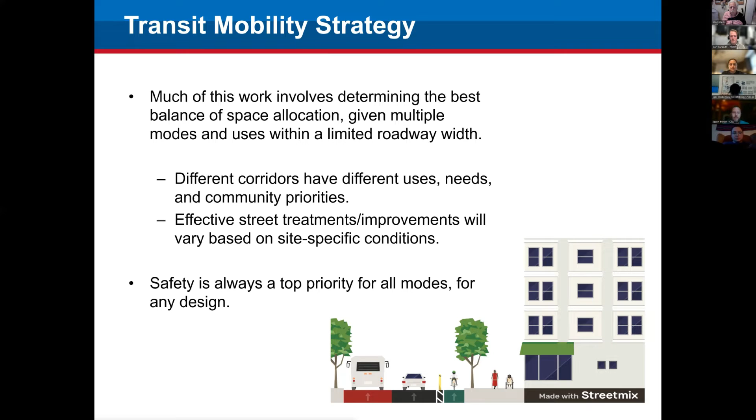So just a quick overview: we'll show some examples of bus priority projects that have already been built, most of them in the past few years, then some that are on the near horizon, and then longer term projects, before we open it up to the floor for discussion.

A few existing examples you may or may not be familiar with. Jeffery Jump was built in 2013, and it runs through the south side and then is an express bus on South Lakeshore before going downtown and utilizing Loop Link. Good segue to Loop Link, which is probably the one most people are familiar with and is the most prominent, going through the loop. We have stations with more amenities than usual, bus lanes, some queue jump signals. They function as bus boarding islands with separated bike lanes. We'll talk a little bit more about those different things as we move on, but it's kind of an example of a lot of what's going on.

And then there's TSP, which stands for Transit Signal Priority. That's when buses automatically talk to traffic signals and can turn the light green, or shorten or extend the green light if they show up on one, so the bus gets through as it's approaching the intersection, increasing speed and reliability. This has been installed on Ashland between Cermak and 95th, on Western from 79th to Howard, as well as some intersections on the Jeffery Jump.

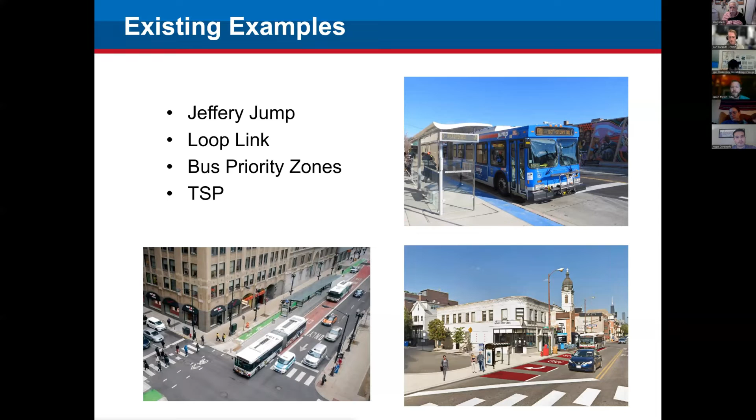So it's not something that you'll see or that's obvious, but it's happening and it's out there.

Now, bus priority zones. This is where we look at very high ridership corridors that have specific pinch points where our data shows consistently low speeds, bad reliability, or other problems which we think could be addressed by short segments of roadway treatments. You'll hear me touch on BPZs throughout this because it falls into both the already-built and short and longer-term categories, so we'll circle back to that.

The example you see here is on 79th Street over the Dan Ryan, near the Red Line station, where we have some bus lanes and shared bus right-turn lanes. Those were installed in 2019 in this particular case.

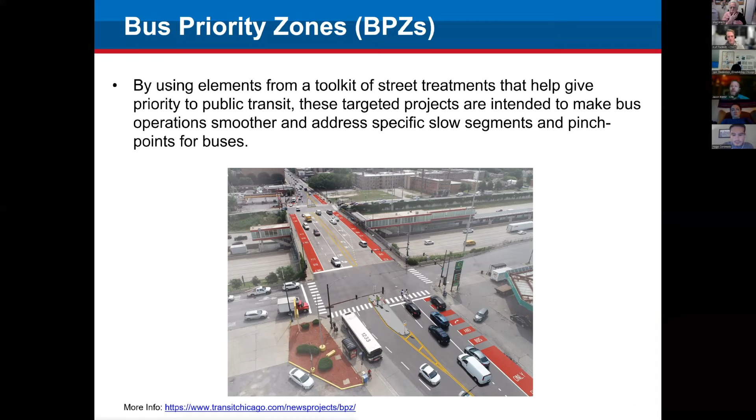When we think about bus priority street treatments, we call it a toolbox of treatments. It's kind of a list of items, not meant to be limiting, but just a resource for when we look at the specific context and issues going on with the opportunity to do a project. They fall into three main categories: bus stop treatments, bus-friendly streets, and bus-friendly intersections.

A couple of examples of stop treatments would be level or near-level boarding. An example of that is at Loop Link. I believe the platforms are 10 or 11 inches high, which is higher than a standard 6-inch curb, so it makes it easier and faster for customers to get on the bus, especially those with limited mobility.

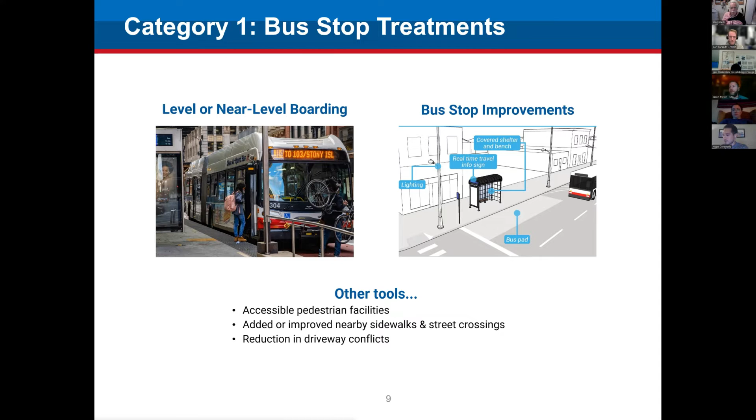Other bus stop treatments could be a bus shelter for the elements, lighting, and accessibility, as far as having clear sidewalk space to deploy a wheelchair ramp, or just for everybody to have a clear path to get on the bus. We look at driveway conflicts, if we can either relocate the bus stop or remove the driveway if it's abandoned. So there's a focus at the stops.

Then there's bus-friendly streets, which is probably what first comes to mind when you think about bus priority treatments on the road. A couple of examples here are curbside bus lanes, but the bus lane doesn't necessarily have to be on the curb. It could be parking on the curb and then what we call an offset bus lane. It could be center-running, which we don't have any of in Chicago, but that doesn't mean it is never an option.

And on the right, you can see an example of a bus boarding island, where there's space to do so. These are especially effective where there's bike lanes and bus service, because at the bus stop, it eliminates the conflict where the bus has to weave to the curb across a bike lane. This increases safety, and also has the benefit where a bus doesn't have to wait to merge back into traffic and wait for a gap. It's stopping in the flow of the lane where it can just continue forward, so increased safety for cyclists, buses, and improved bus operations.

So it's kind of a win for multiple modes there.

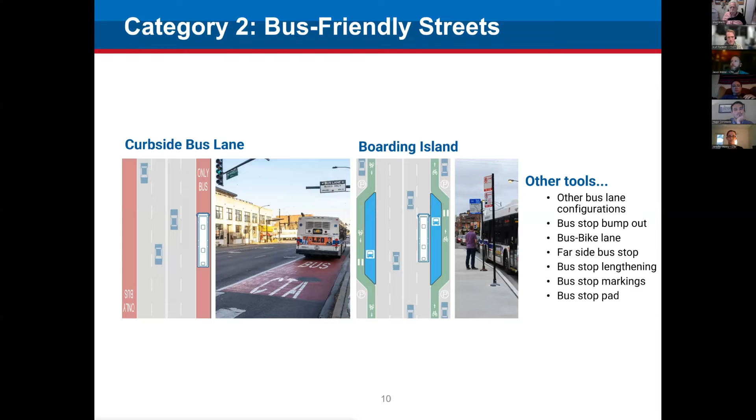Some other tools we have would be a bus stop bump-out, also referred to as bus bulbs. They function similarly to the boarding island, except it would be in the absence of a bike lane or where there's not enough room to have a separated bike lane and a bus bulb. The big benefit of that is at intersections, it's kind of like a pedestrian bump-out, if you will, that shortens the crossing distance, except it's just long enough that it covers the front and rear doors of the bus. So the bus can stop there and then just pull forward without the delay of having to wait to merge back into traffic. There are several other treatments we could do on the roadways, but in the interest of time, I'll keep moving on.

Then there's bus-friendly intersections. I had talked about transit signal priority earlier. Sometimes that's done, or most of the time in Chicago it's done just as a standalone treatment where general traffic will get the green light with the bus. In a few instances, the bus has its own space where transit signal priority actually activates a queue jump signal.

Which brings me to the queue jump, the other example shown here. If you picture it looking at the diagram, if a bus has its own lane and pulls up to an intersection on a red light, the queue jump signal—it's actually like a white vertical bar—means go to the bus.

It's not green just to avoid confusion with general traffic, but it allows the bus to get through the intersection before the rest of the cars waiting at the red light. So just like the name implies, it's jumping the queue of cars and therefore prioritizing the bus service.

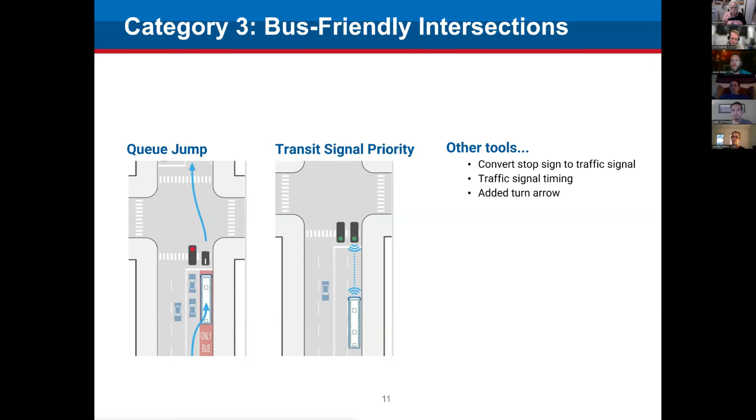Other tools at intersections that help traffic in general can be useful for buses as well, if it's a movement that they're making, just traffic signal coordination and optimized timing and adding a left turn signal, things like that. So we're always working to improve that on bus corridors. So that was just some examples of what we have been doing.

Right now on Route 20 Madison and 157, which I forgot the name of the route, it goes down Ogden and up into the Loop. Those two routes are complete, with rollout on 7 more routes anticipated by early 2023. At that point, if we get some feedback from the community and internally as well, and if it's positive, that could open the door for seeking additional grant funding or seeking next steps to continue to deploy the tactile signs.

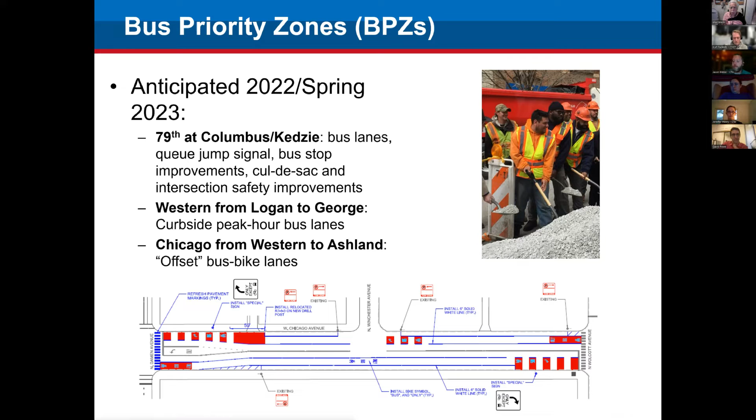They only have two lanes of traffic to cross now instead of four. And the bus can just pull forward after people get on and off, because it doesn't have to pull to the curb and wait to merge back over. So for pedestrians, cyclists, and buses alike, this was a win all around.

Also looking forward, either starting later this year or in the spring, on Laramie, we're getting creative with a hybrid bus bike lane. I've got to give CDOT some credit here for opening the door to this type of innovative treatment. In an ideal world, we'd have a separate lane for buses, for bikes, boarding islands, and everybody would have their own space.

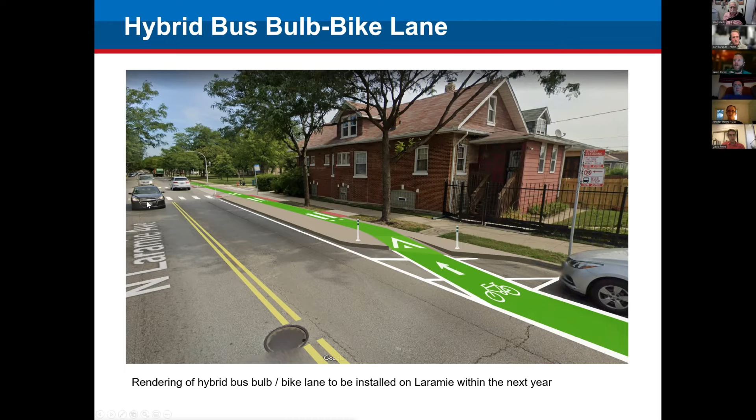And we're still maintaining the through sidewalk for pedestrians while giving bus riders a space to wait that's in addition to the sidewalk. So again, it's a plus for multiple roadway users. And you can see it shortens the crossing distance for pedestrians as well.

So getting into longer term projects, I'll start talking about bus priority zones again. This is the last bus priority zones slide, but we can get into it more later. We received some grant funding that will expand the bus priority zone initiative, and we're looking to reach additional corridors and neighborhoods. As I mentioned before, it's really looking at spot treatments and improvements to unsnarl the bus at pinch points where we have lots of frequency and lots of ridership.

Just like everything else, it's going to be a balance of the space being allocated to different roadway users, but we really think that there's a lot of places that have an opportunity for these targeted bus improvements that will really move things along. So we're also working with CDOT on this hand in hand, looking for opportunities for cost savings to really stretch the limited funding that we have, looking at overlapping projects so that when it comes to construction, we can make the best use of resources.

For example, if a road is going to be resurfaced anyway, that gives us a blank slate for the pavement marking that'll go down. Under the resurfacing program, which is federally funded, there's opportunity for minor curb changes, maybe a bump out or bus bulb, that kind of thing. So we're really looking to collaborate and make the most of our limited funding for that.

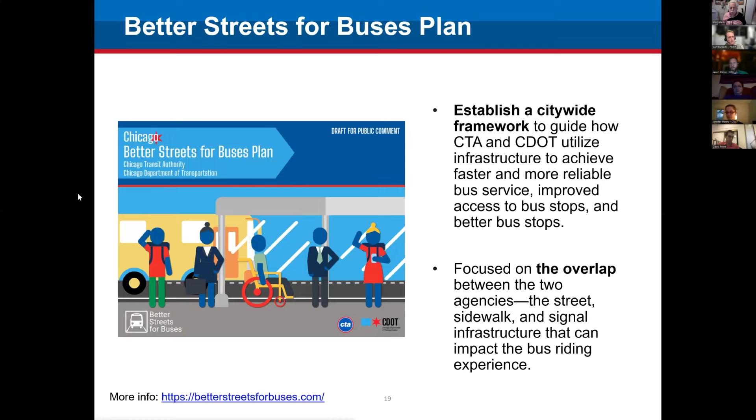And also improved access to bus stops and better bus stops. So there's a number of things that impact the bus experience that are sort of in CTA's control more or less, and don't have a lot to do with CDOT, like the frequency of scheduling. And there's a lot that CDOT does that doesn't necessarily impact the bus directly. So this plan is really focused on the overlap, the sidewalks, streets, and signal infrastructure that can impact the bus ridership experience. Next slide, Jason.

The plan is to have two main components. One is a street network that identifies where we would be prioritizing improvements. And then a toolbox of street treatments, which is sort of a menu of all of the different street treatments you can do that Jason actually summarized earlier in the presentation.

So in April, we began our public outreach process. We had a couple of virtual public meetings in May, and ended the public comment period in June. We had a number of activities to try to get the word out. It was a challenging time because we had to do most of the planning during the pandemic. So we did lean heavily on virtual interaction, but we tried to supplement it with hard copy materials at libraries, through ward offices, et cetera. So we wrapped that up in June.

Over the summer, we've been compiling and reviewing and analyzing all of the feedback that we received. And we're just now moving into the stakeholder discussions again to try to decide how we use that feedback to form and revise a final plan. We'll be doing another round of follow-up public outreach, but we haven't figured out the dates or times or places yet. So I don't have any of those to announce. And then the goal would be to finalize the plan in very early 2023.

Next slide. And then I just really wanted to talk about electric buses too. It doesn't have as much relevance to the CDOT realm as some other things, but I know a lot of people are interested in it. So if you weren't aware, we did release a roadmap for electrification of the full fleet by 2040. Our fleet is around 1,800 buses, so it's no small undertaking. We put equity considerations at the forefront in terms of prioritizing which garages would go first, and that plan talks more in detail about that.

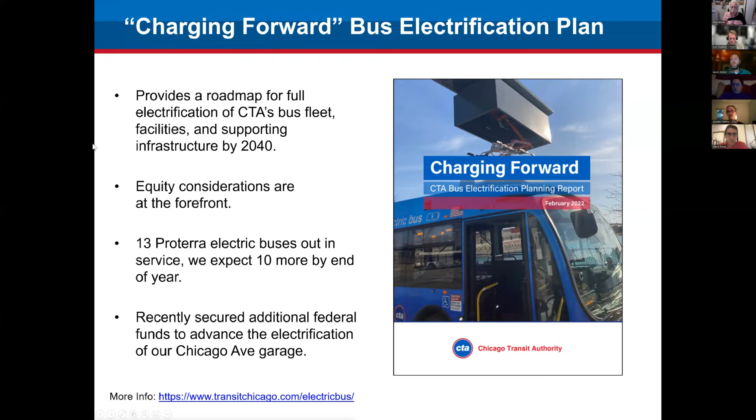Currently, we have 13 Proterra electric buses out in service on the 66 route. We expect 10 more to be deployed by the end of the year. And we recently secured an additional federal grant to advance the electrification of the Chicago Avenue garage. Next slide.

There are 3 on-route charging locations currently at Navy Pier, Chicago Austin bus turnaround, and at Midway. But the analysis that we did as part of Charging Forward to really see how we get to 100% concluded that the best approach to charging electric buses is to maximize charging at bus garages rather than having a lot of on-route locations. So we're anticipating a very limited number of additional on-route fast charge locations at certain key layover locations. So there won't be a lot of impact on the public right of way with respect to the electric buses.

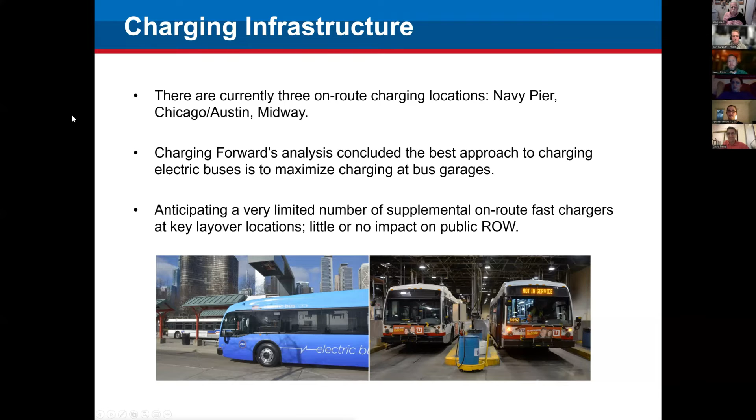The goal is to keep our service, not disrupt our service and not disrupt the public right of way with charging stations. But there's also just more practical considerations about centralizing the charging at the garages. It just makes it easier to manage. I think that might be it. Do I have any more slides? Nope, that's it. So I guess, Kurt, are you sort of facilitating from this point?

Yeah, absolutely. And I don't think I introduced myself in the beginning, but my name's Kurt Facknitz. I'm the design manager for the Complete Streets program at the City of Chicago. Wanted to table set a little bit on starting off the conversation at the end of this presentation here. We will get through some questions, so I will talk a little bit about those, but really want to make sure that this is more than a question and answer session, but a real collaborative discussion. And so as we're talking about some of these things that we'll work through, I can, again, facilitate that a little bit.

Definitely want this to be a conversation and not just Jason and Jen fielding these questions and giving answers, but really want a discussion about everyone in this group's thoughts, opinions, feelings about all these things that we're talking about, and the ways that we can sort of work together to get where we want to go in terms of improving safety, efficiency, comfort, availability of transit, and really making our streets work for all modes.

So to that end, to get started, and again, I'll work through a lot of these questions, but one thing that I think popped up that's really important and kind of bleeds into a lot of the things that Jason and Jen were talking about is, why, oh, sorry, I think my chat jumped.

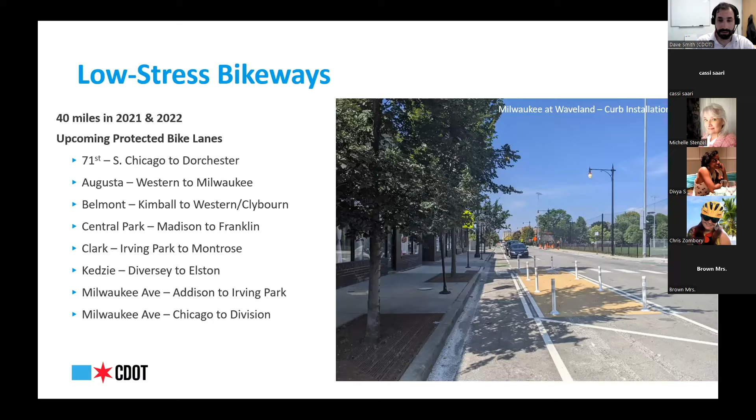And so the goal is to create a connected network of low stress options throughout the whole city. One of the things that we've heard quite a bit in our engagements, especially for people who are new to biking, is that providing a network that highlights local trips and local destinations is really important. And so we want to balance both of these scales, developing networks for neighborhoods, but also developing a comprehensive network across the entire city. And so the discussion here and this presentation is really about how do we prioritize where we go next? I've got a couple of slides here.

Chicago really is a city of neighborhoods. Different neighborhoods have different contexts, different perspectives, different needs when we're thinking about the citywide scale. And this graphic is trying to get at an acknowledgement of that, that it's not necessarily a one size fits all approach across the entire city. Network development is most successful when we partner with communities. And in the past, which I'll touch on in a minute, sometimes skipping through the process, especially in a community where biking isn't as visible, has been a challenge and has actually set us back. And so our goal is to speed up this progression, bring every neighborhood to the next stage of network development, and get as quickly as possible to a citywide network of protected bike lanes and neighborhood bike routes.

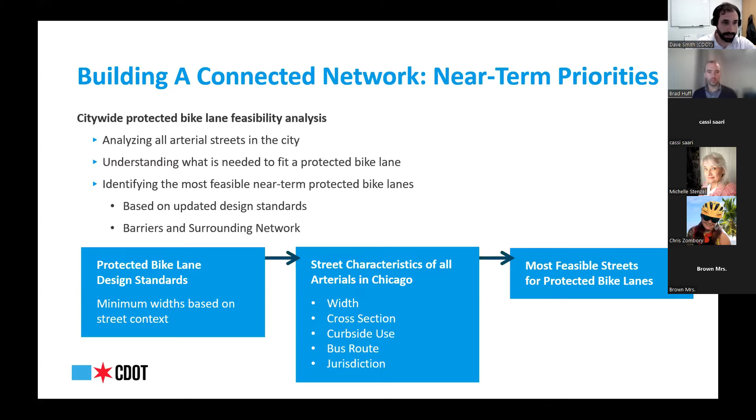I think this analysis can be really helpful in pointing us towards prioritizing streets and identifying where we need to push for top infrastructure, and to help make the case for trade-offs when it comes to creating space and allocating space on our roadways.

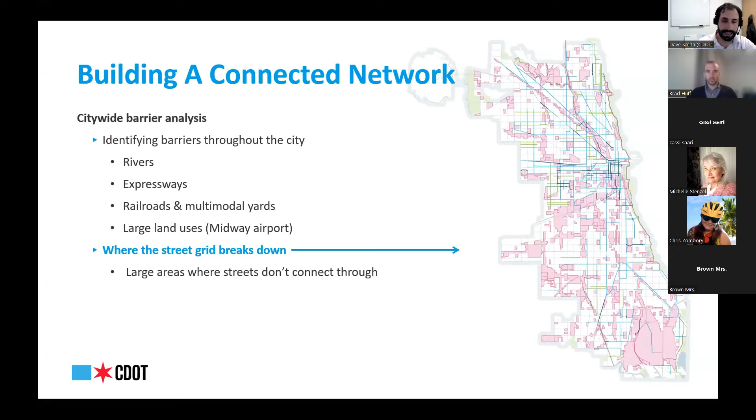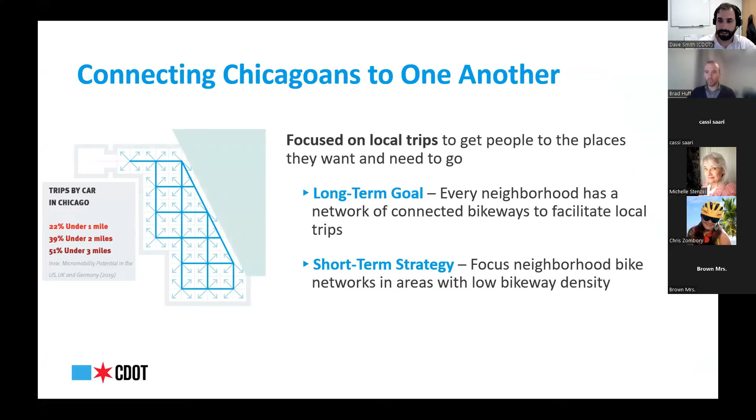I mentioned earlier that the neighborhood network effort has been focused in communities that have historically had very little. This year, we're partnering with the South Lawndale Little Village community, and we want to keep that momentum going to the larger Southwest side in the future.

The neighborhood network process we started last year, we worked in the North Lawndale community, and really started to build a relationship and regain trust within the community. We were able to come back last year and install protected bike lanes along Douglas and Independence Boulevard leading to Douglas Park.

We're continuing to partner with the Belmont Cragin community to keep the momentum going. But like I said, we really want to expand that to the southwest side where there's very little bicycle infrastructure. As I mentioned, balancing the neighborhood approach, the goal is also to create a citywide network of protected bike lanes, neighborhood greenways, and something we want to talk about in a couple minutes is how do we get there as fast as possible while still maintaining trust, maintaining relationships, and long-term success.

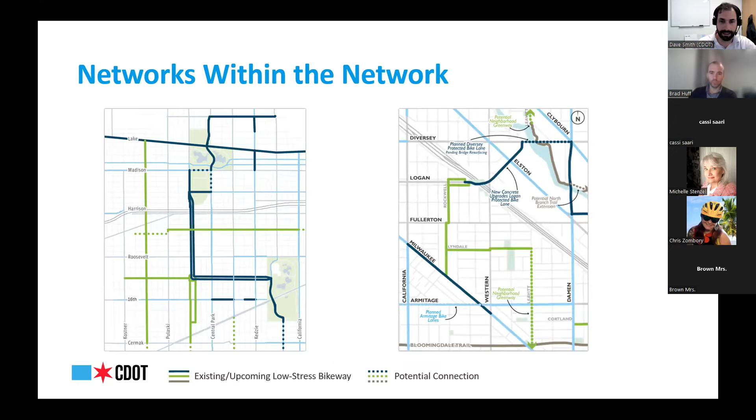One strategy is to think about developing networks within the network. So community networks, providing people with comfortable options to get to important neighborhood destinations like parks, schools, and commercial corridors. But again, thinking about that in the context of the entire city and balancing those two scales.

This is the second to last slide, and we'll get into the discussion, but wanted to show a map and a little bit of a preview of where our minds are at in terms of 2023 priorities. We want to get feedback from folks on what makes sense, what we're missing, and where we should be focused.

Secondly, we are partnering with IDOT on designs for protected bike lanes. As some of you know, the Clybourn protected bike lane, installed many years ago, was the first protected bike lane on an IDOT jurisdiction street. We've been cultivating and developing that relationship with them.

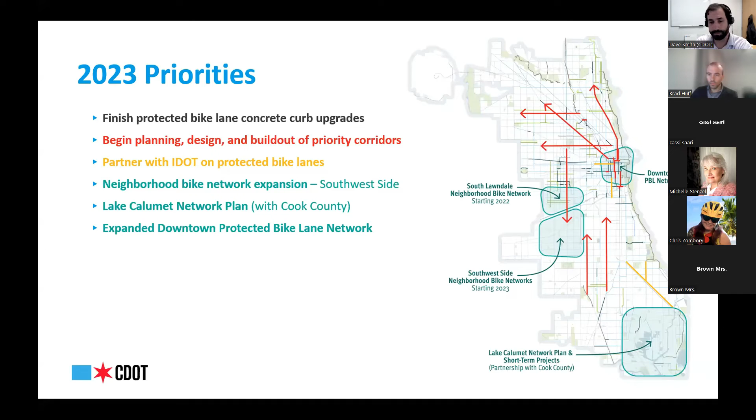I tried to get through that as quickly as possible. We want to move that into just an open discussion now, and I'll stop sharing my screen in a second so we can see each other a little bit better.

We put together these points just to help spark some conversation. First, there's a ton of work to do. We all agree on what we want to do, and we want to have a discussion of how we prioritize projects and neighborhoods. How do we engage with neighborhoods on the importance of a citywide connected network?

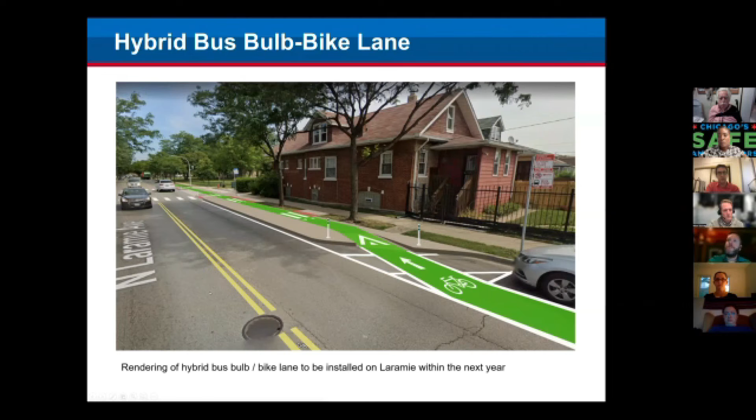On top of that, we also create digital content that goes on our social media, with the goal of having it shared to the ward office. We're still maintaining the through sidewalk for pedestrians while giving bus riders a space to wait that's in addition to the sidewalk — so it's a plus for multiple roadway users, and you can see it shortens the crossing distance for pedestrians as well.

So getting into longer term projects, I'll start talking about bus priority zones again. This is the last bus priority zones slide, but we can get into it more later. So we received some grant funding that will expand the bus priority zone initiative, and we're looking to reach additional corridors and neighborhoods. As I mentioned before, it's really looking at spot treatments and improvements to kind of unsnarl the bus at pinch points where we have lots of frequency and lots of ridership.

Every time a city street gets resurfaced under our arterial resurfacing project, that's an opportunity that CDOT actually has been using for years and years to look at that corridor, look at the lane widths, look at all the pavement markings, and then try to incorporate any new designs that we can to make the most of it, right? As long as you're going to be resurfacing the entire street, this is a great opportunity, and there's more coordination than ever has happened before.

So some of the projects that Angel mentioned, like contraflow bike lanes, for instance, are some of those more innovative things that people aren't necessarily used to seeing every day get incorporated into those resurfacing projects. And it's the work of ambassadors to go out and, like he said, post the signs, help people get acquainted with the new style of bikeways. We used to just have one in this city, and now there are so many different designs and world-class changes that are happening.

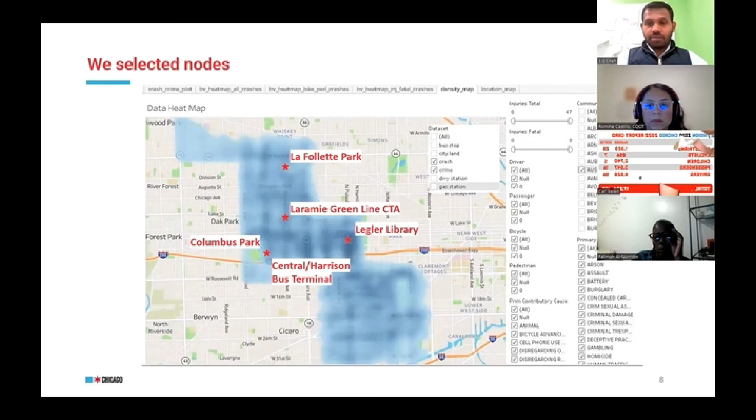Because when you have more of these concentrated around an institution or node, the more benefits you can see from those improvements. One such example is the Jackson Boulevard project, which previously was a 4-lane street through the heart of Columbus Park. We heard from people that it was very difficult for them to access the park because most of the residents live on the north side and most of the park is on the south of Jackson Boulevard. So what we did was we narrowed the street down to 1 lane of traffic in each direction.

We installed pedestrian safety improvements, such as pedestrian refuge islands, but also transit improvements, such as bus boarding islands, to make those bus stops more accessible and improve the experience of people riding transit through here. We also included protected bike lanes through this section of Jackson Boulevard.

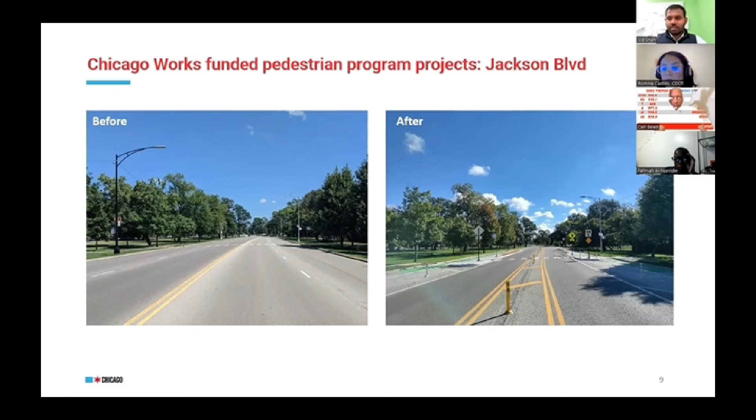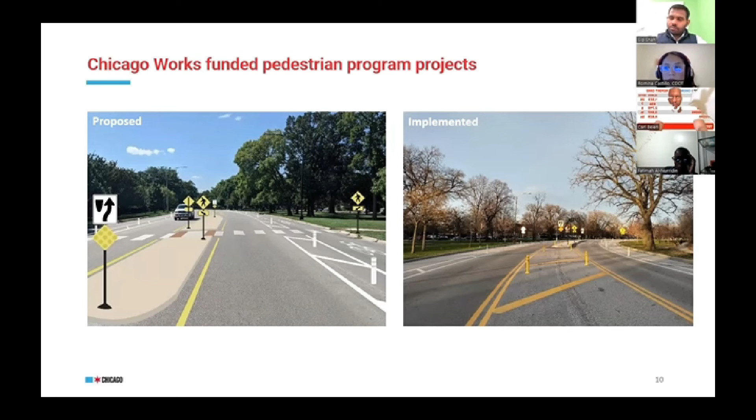Here you can see a rendering of what we had proposed in a meeting with the ward, and then what actually got built. So when we talk with the community, we show them exactly what they could expect, and then we are trying to deliver on that. And it is possible because we have the Chicago Works funding to be able to do that.

We are trying to build partnerships with community institutions to make sure that we are not just informed by data, but are also informed by lived experience of the people. Once we identified the library as one of the nodes we wanted to focus on, we talked with the Melody School, which is between Wilcox and Adams, just east of Pulaski.

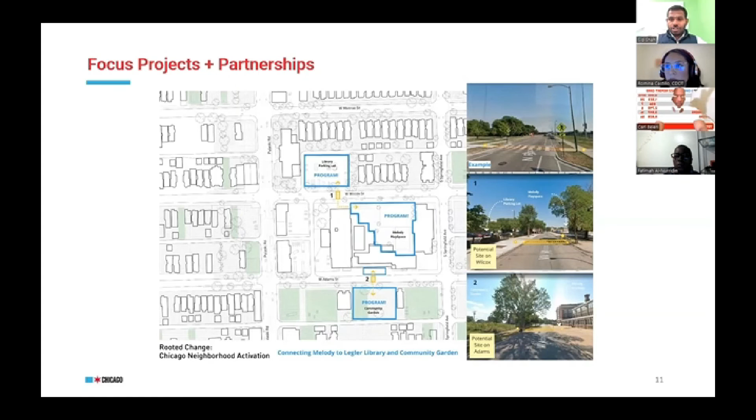What we learned from the school is they have programming going on with the community garden that they have on the south side of the school, and some people go to the library parking lot that's on the north side. What we did was we wanted to make sure that this lived experience is translated into a project.

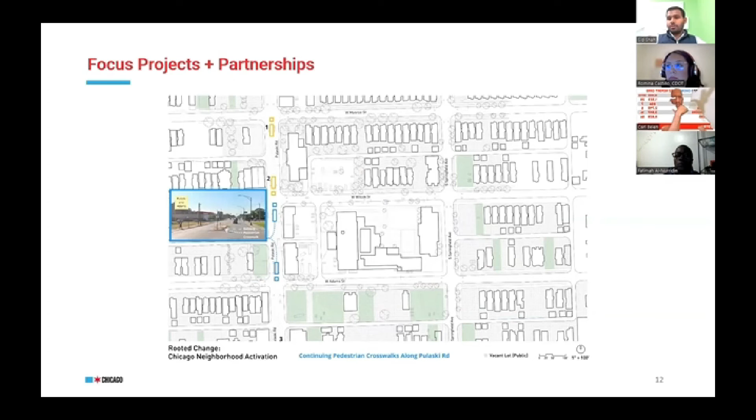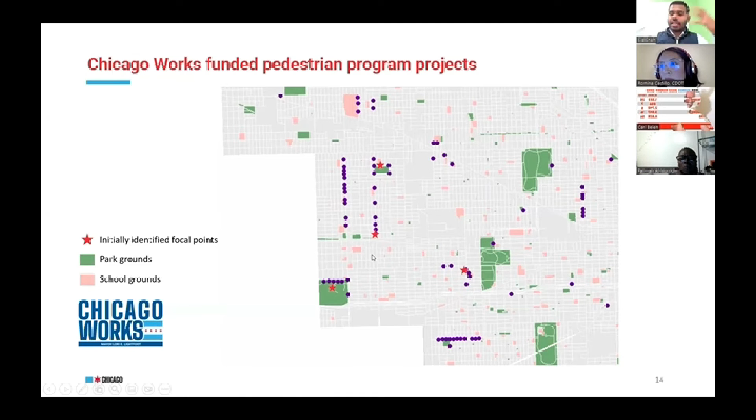So these were two projects that I talked about, but we have a slew of pedestrian safety projects that we are taking from the West Side Plan and Northwest Side Plan recommendations and converting to reality. One of the exciting ones has been the Central Avenue project that is already installed and has improved crossing in front of Milton Brunson School, which was one of the big ideas proposed in the Vision Zero West Side Plan.

We are continuing our focus on schools and parks, though. So this is a project that we are proposing in front of the Garfield Park Conservatory on Central Park Avenue to help people cross Central Park Avenue from the conservatory to the other side of the street. We were targeting installation this year, but it seems like the contractor is having capacity issues, and it will be installed early next year at least. This is paired with protected bike lanes on Central Park Avenue.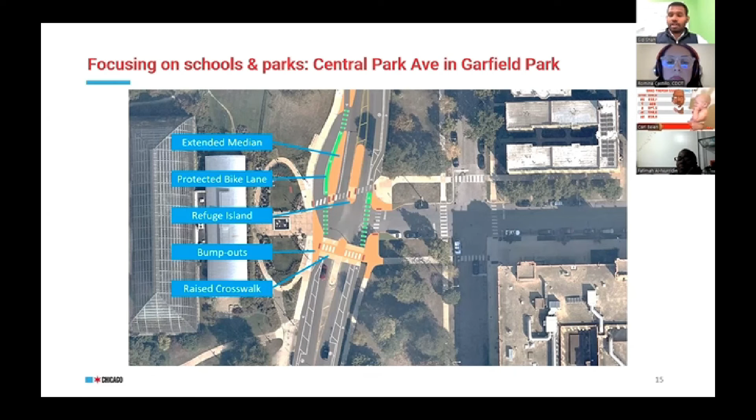So whenever we are doing a project such as a pedestrian focus project, we are also leveraging us already being there and trying to incorporate as many other multimodal improvements as we can at the location. Right now, you're in the pedestrian projects breakout group, but you will hear something similar in the other breakout groups, such as the bike program. Whenever there's a bike project going in, they are installing pedestrian improvements as well. So there are various ways in which the department is trying to install improvements. We are focusing on schools.

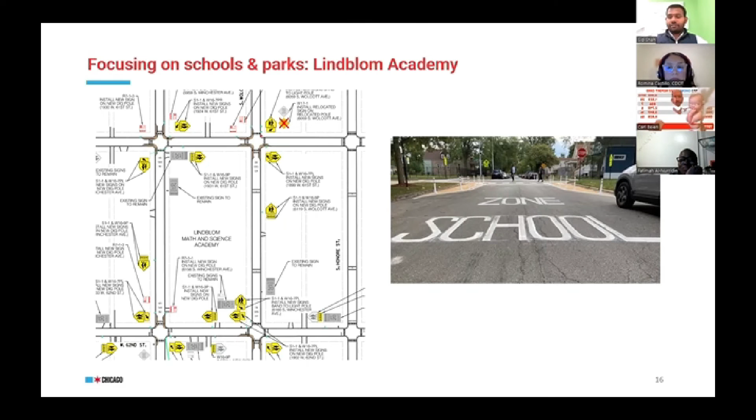We talked a little bit about the other Vision Zero planning efforts. So we are really excited to be wrapping up on the Vision Zero Northwest Side Community Plan, and the Vision Zero Southside Community Plan is also in its almost final stages. And this will give us recommendations for newer projects, and we will be working to ensure we can get the maximum of those recommendations turned into reality. This is the strategy that we are using for whatever local money that we have, and we would love to hear from you about how you think of the strategy.

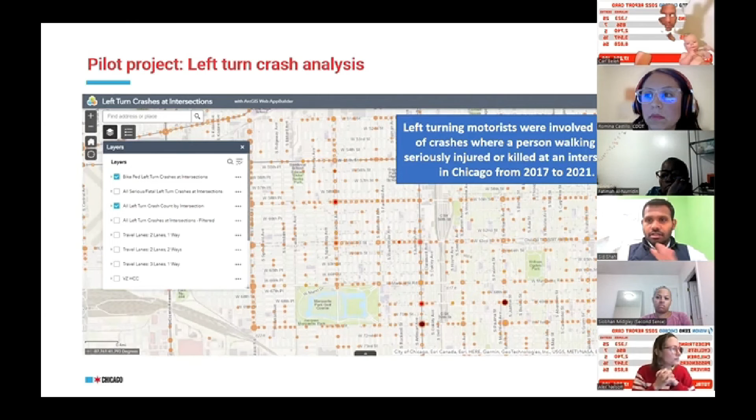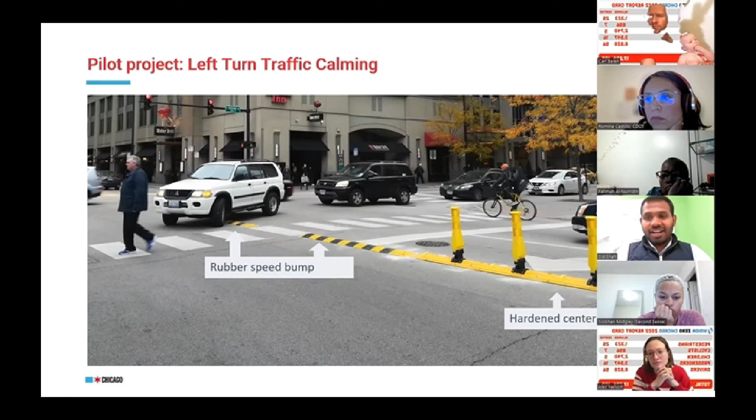We'll soon open it up, but let me take a moment to say that we have a few things coming up. So with the Vision Zero Southside community planning effort wrapping up, we do have a Cottage Grove safety workshop on October 15th and a 59th Street safety workshop on October 26th. There are open boulevard events happening. One on Drexel Boulevard in Bronzeville just happened on September 18th, but there's the Douglas Boulevard event happening in North Lawndale on October 16th, and the Logan Boulevard one happening on October 30th.

We want to keep in mind all the people that we have lost due to traffic violence. We will be participating in the World Day of Remembrance for traffic violence victims on Sunday, November 20th. And we are lining up the planned releases for the Vision Zero Northwest Side and the Vision Zero Southside Community Plan. With that being said, I think, Romina, that ends the presentation part of the breakout group. We can probably hear from people, and I'll turn it over to you.

Yeah, and I know that there have been some questions in the chat. Thanks, Ms. Lucas. I was just going to mention, we do have about 30 people in the room, so it would be great to raise your hand so we can see you in the queue. Just to summarize, Sid talked a lot about projects and the big strategies that we're trying to incorporate in the projects that we're doing. And then he dived specifically into some examples in schools and parks, boulevards and some other parts of the city. So I'll stop right there. I saw Ms. Lucas' hand going up. We just wanted to address some questions first before diving into the questions that we have for you. So Ms. Lucas.